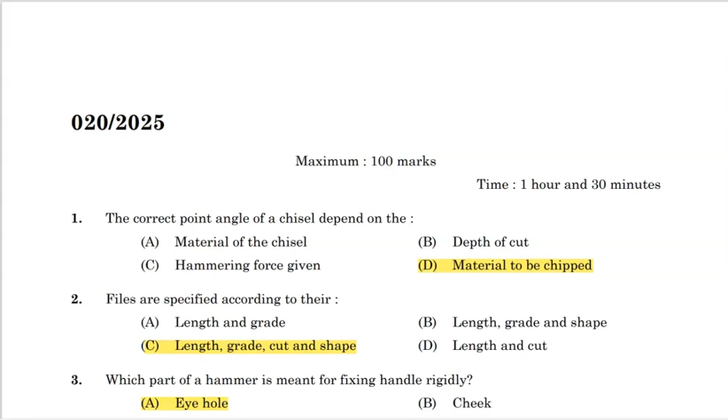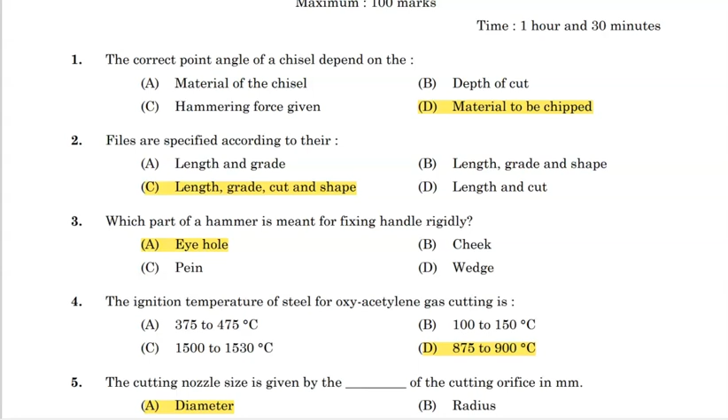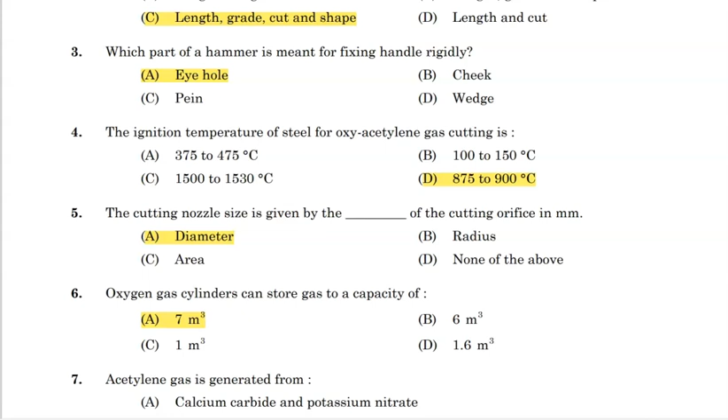5. The cutting nozzle size is given by the diameter of the cutting orifice in millimeter. A. 6. Oxygen gas cylinders can store gas to a capacity of 7 meter cube. A. 7. Acetylene gas is generated from B, calcium carbide and water.

8. Which oxy-acetylene welding flame is used for welding mild steel? A, neutral flame. 9. The selection of flux in gas welding depends upon A, composition of material to be joined.

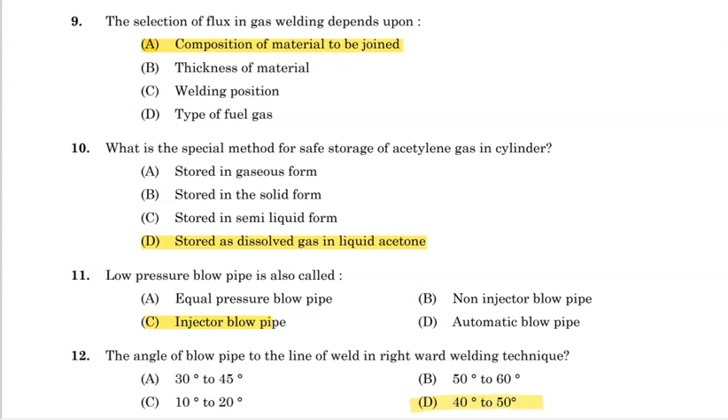10. What is the special method for safe storage of acetylene gas in cylinder? D, stored as dissolved gas in liquid acetone.

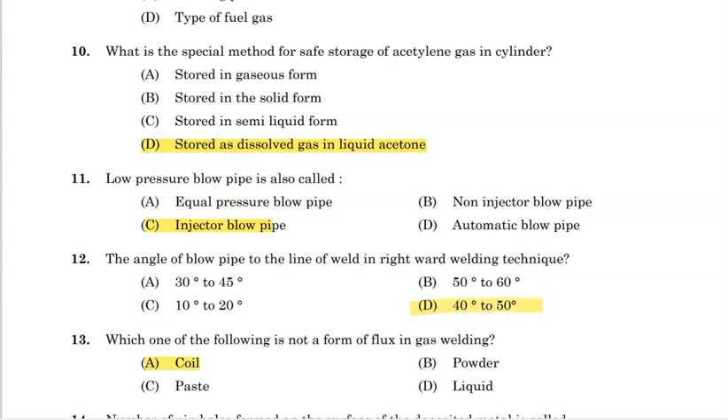11. Low pressure blowpipe is also called C, injector blowpipe. 12. The angle of blowpipe to the line of weld in right ward welding technique? D, 40 degree to 50 degree.

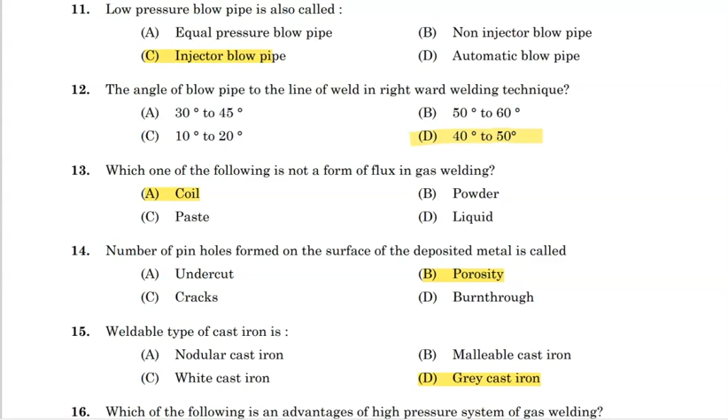13. Which one of the following is not a form of flux in gas welding? A, coil. 14. Number of pinholes formed on the surface of the deposited metal is called B, porosity.

15. Weldable type of cast iron is D, grey cast iron. 16. Which of the following is an advantage of high pressure system of gas welding? A, working efficiency is more.

17. What is the first compartment contained in the purifier? B, pumice stone. 18. The melting point of zinc is A, 419 degrees Celsius.

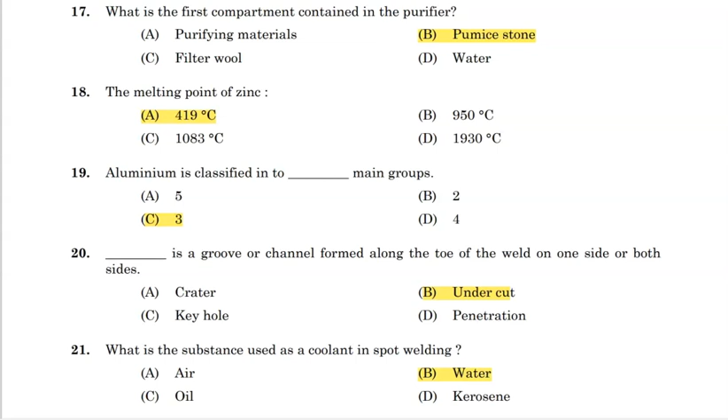19. Aluminum is classified into 3 main groups. C. 20. Undercut is a groove or channel formed along the toe of the weld on one side or both sides.

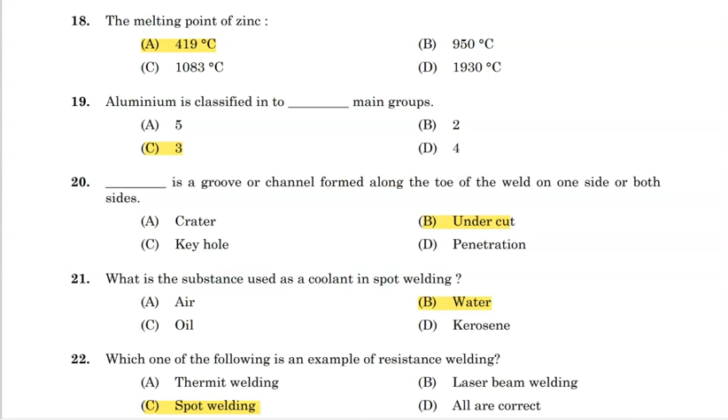B. 21. What is the substance used as a coolant in spot welding? B, water. 22. Which of the following is an example of resistance welding? C, spot welding.

23. The fusion is produced by the heat obtained from a concentrated beam composed in electron beam welding, primarily of D, high velocity of electrons.

24. Which of the following resistance welding machine is used to join pipe sections end to end? B, butt welding. 25. Which of the following operating variable in submerged arc welding controls the arc length? A, welding voltage.

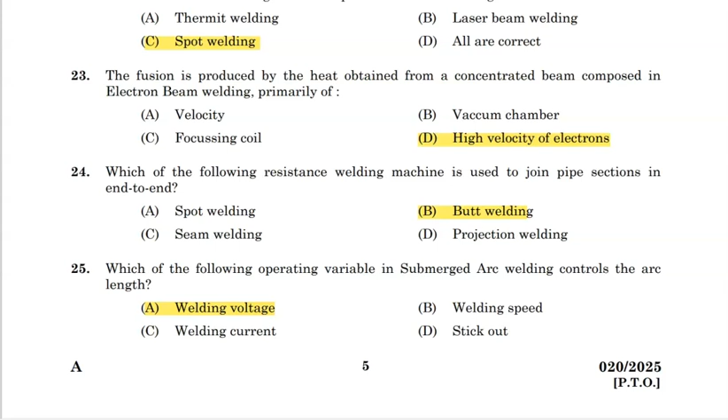26. Which of the following is not an advantage of resistance welding? B, the equipment is costly.

27. Which of the following property of flux is used in electroslag welding? A, it has high electrical resistance.

28. The reaction that takes place in thermit welding is B, exothermic. 29. In thermit welding, heat is produced between aluminum powder and iron oxide in right proportion. D.

30. Which is an advantage of friction welding? C, no filler rod or electrode is required. 31. Which of the following statements are correct about laser beam welding?

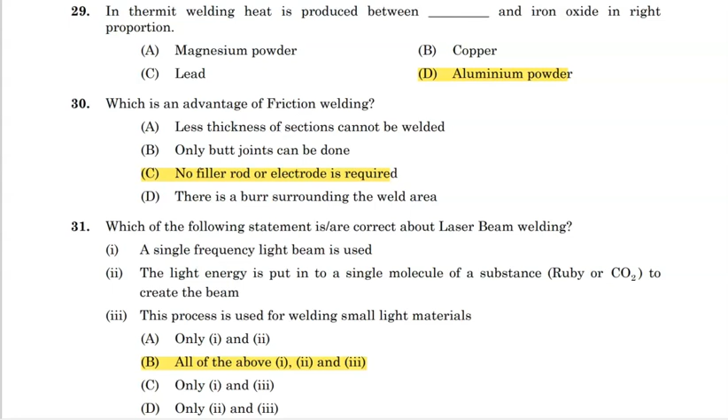ഇവിടെ തന്നിരിക്കുന്ന 3 ഉണ്ട്, അപ്പോൾ ഉത്തരം B ആണ്, all of the above.

32. The multi spot welding is A, projection welding. 33. Thermit welding is a form of C, fusion welding.

34. Which type of joint is required for spot welding? C, lap joint. 35. Electron beam welding is an automatic process performed in vacuum without a shielding gas. A.

36. A welder qualification test is to verify B, skill of the welder. 37. WPS means B, weld procedure specification.

38. Which of the following destructive test is related to Izod and Charpy machines? A, impact test. 39. The surface and subsurface cracks in the weldment of magnetic alloys can be inspected by D, magnetic particle test.

40. Guided bend test is used to determine ductility of the weld metal. A. 41. Temperature of plasma arc cutting is A, 20,000 Kelvin.

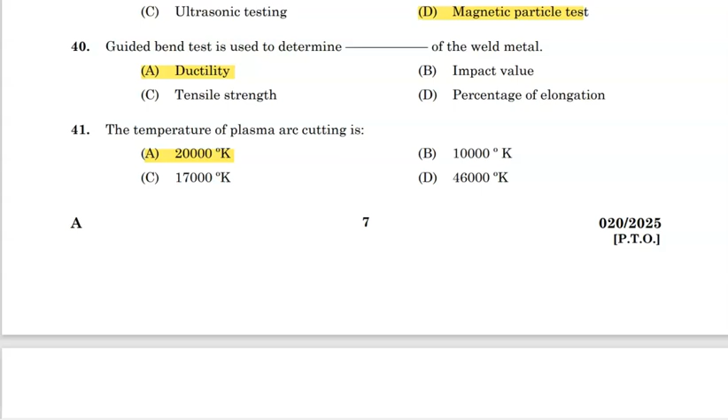42. Stainless steel can be cut easily by plasma arc cutting. 43. Surfacing is done to build up worn out parts of material whose dimensions have been affected, and make them as good as new, obtaining the required properties.

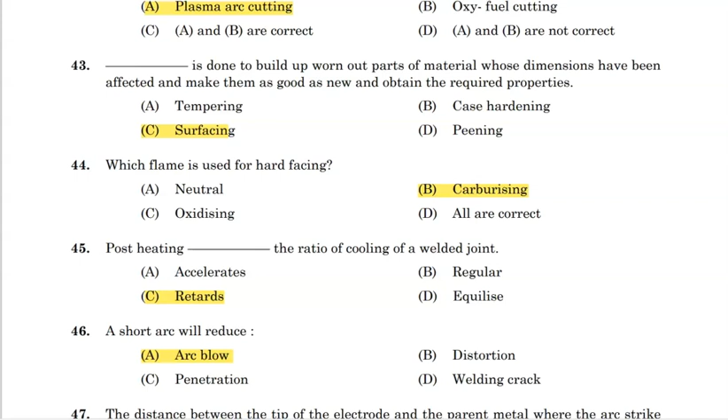C. 44. Which flame is used for hard facing? B, carburizing. 45. Post heating retards the rate of cooling of a welded joint.

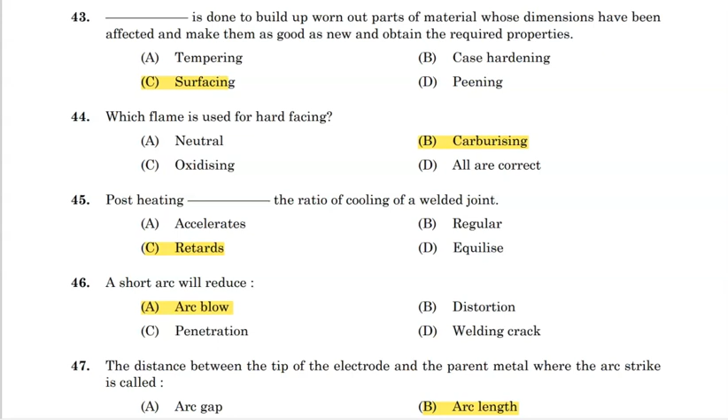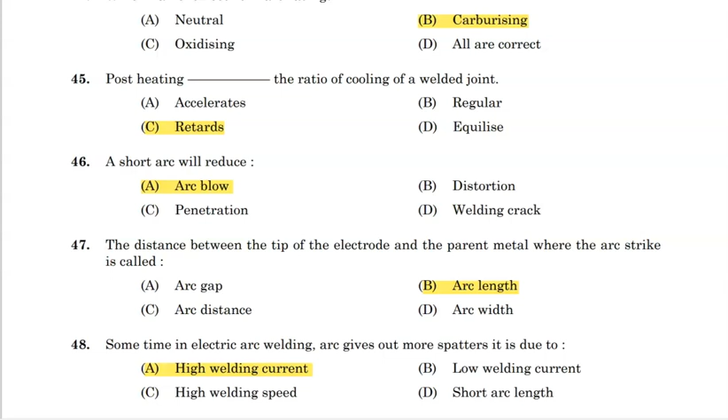C. 46. A short arc will reduce arc blow. A. 47. The distance between the tip of the electrode and the parent metal where the arc strikes is called B, arc length.

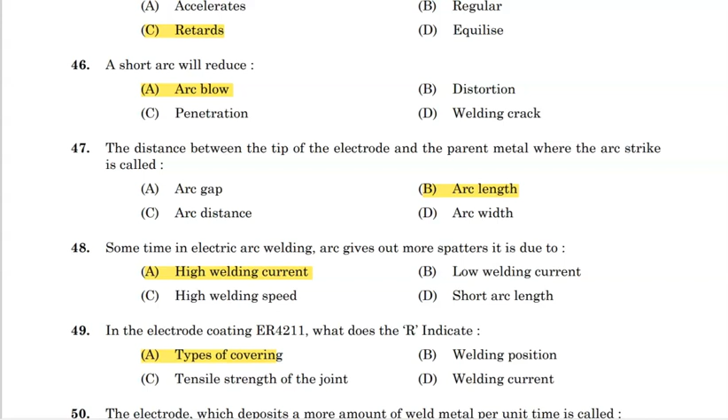48. Sometimes in electric arc welding, the arc gives out more spatters. It is due to A, high welding current. 49. In the electrode coating ER4211, what does the R indicate?

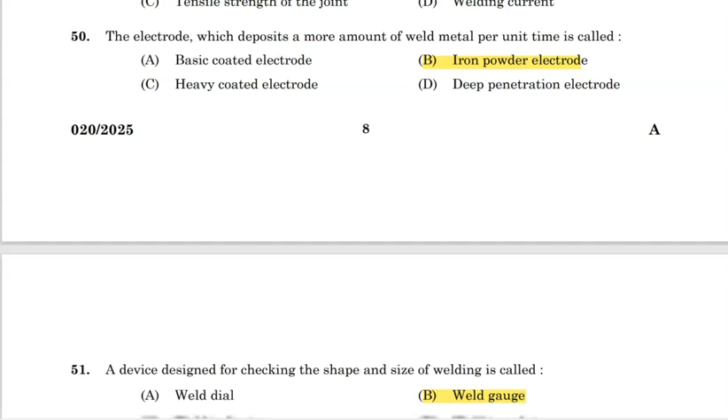A, types of covering. 50. The electrode which deposits a more amount of weld metal per unit time is called B, iron powder electrode. 51. A device designed for checking the shape and size of welding is called B, weld gauge.

Welding transformers are equipped with condensers to improve power factor. A depression formed at the end of the weld is called a crater. Electrode used for arc welding of aluminum contains 95% aluminum and 5% silicon.

The process of hammering the weld metal immediately after it is deposited is called peening. The semicircular deposit on a weld bead is called reinforcement. If two members are welded in the same plane, it is called a butt joint.

The conversion function of a rectifier is to convert AC, alternating current, to DC, direct current.

The pipe welding position that stands for 45-degree inclined position welding is 6G. The vertical position of groove welding is defined as 3G. The purpose of wrapping the weld cable around the job in welding is to control arc blow.

When hydrogen control is specified for a manual metal arc welding project, the electrode would normally be basic. For open site manual metal arc welding, the following equipment is available.

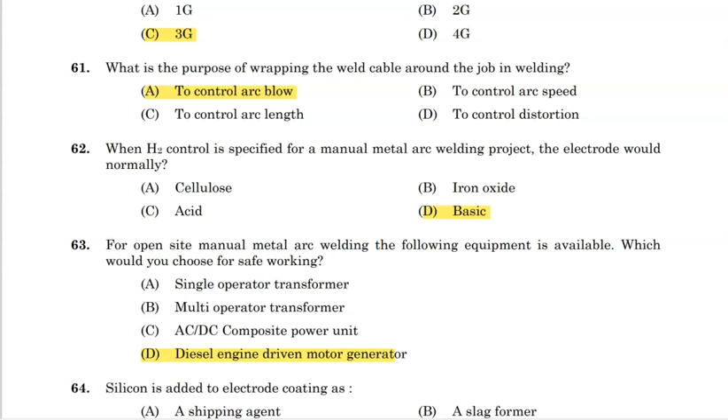For safe working, you would choose a diesel engine driven motor generator. Silicon is added to electrode coating as a deoxidant. When welding thin plate, distortion can be minimized by using back step welding.

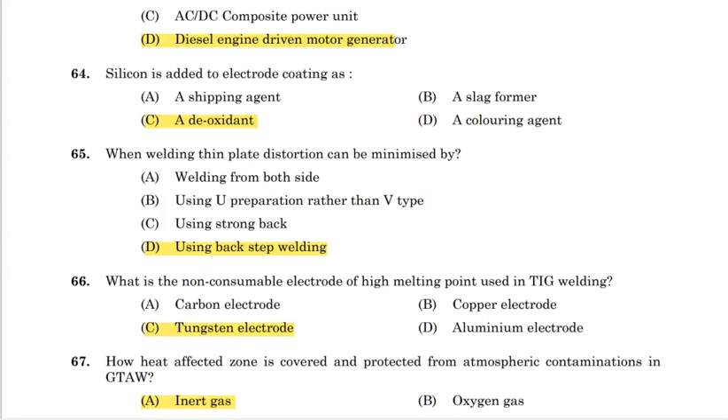The non-consumable electrode of high melting point used in TIG welding is the tungsten electrode. The heat affected zone is covered and protected from atmospheric contamination in GTAW by inert gas.

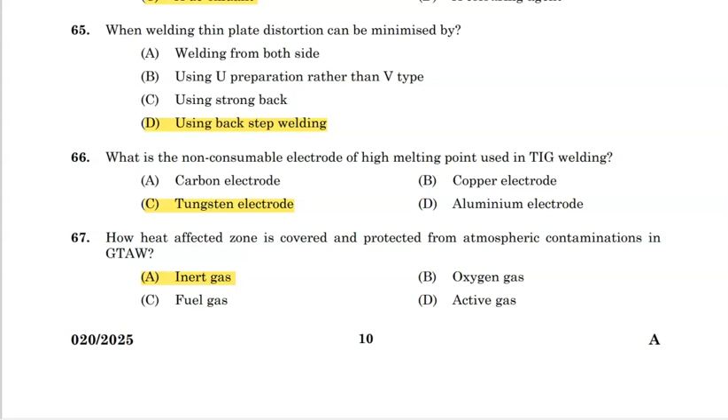The tungsten electrode suitable for welding stainless steel by TIG process with DC is the thoriated tungsten electrode. The current supply best suited for GTAW of aluminum and its alloys is AC. The defect while TIG welding if the current is too low is lack of fusion.

The electronic unit that helps initiate the arc in the TIG welding process is the high frequency unit.

The element added with tungsten to increase the current carrying capacity in TIG welding is thorium oxide.

The reason for using an AC power source in the TIG welding process while welding aluminum is that it cleans aluminum oxide.

TIG welding nozzles are made of ceramic. The color identification of tungsten with 2% thorium TIG electrode is red.

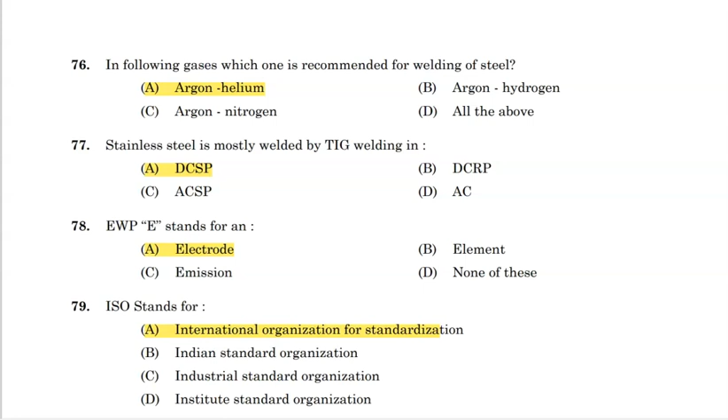EWP, the E stands for electrode. ISO stands for International Organization for Standardization.

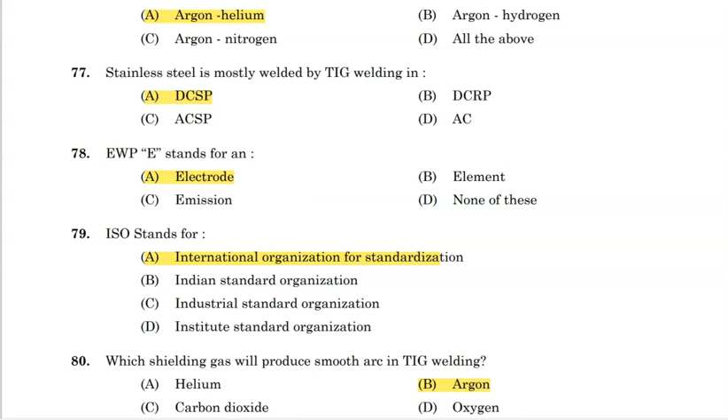The shielding gas that will produce a smooth arc in TIG welding is argon. The process also referred to as GTAW is TIG welding.

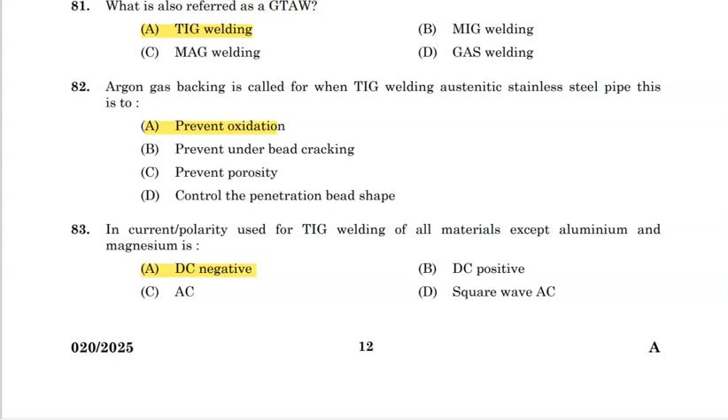Argon gas backing is called for when TIG welding austenitic stainless steel pipe, to prevent oxidation. The current polarity used for TIG welding of all materials except aluminum and magnesium is DC negative.

Pipe bores of some materials must be purged with argon before and during TIG welding in order to prevent oxidation of the root bead.

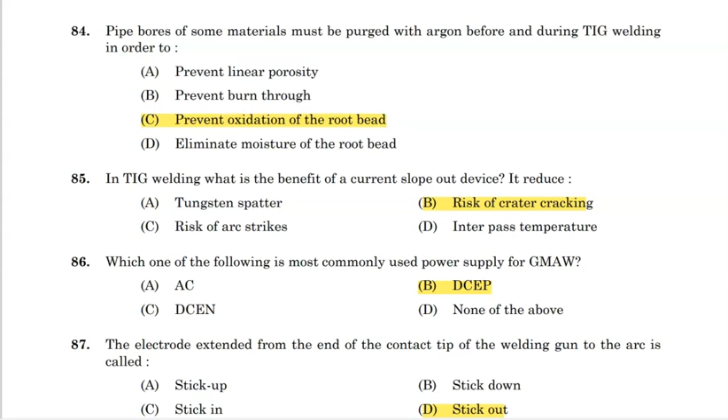In TIG welding, the benefit of a current slope out device is that it reduces the risk of crater cracking.

The most commonly used power supply for GMAW is DCEP. The electrode extended from the end of the contact tip of the welding gun to the arc is called stick out.

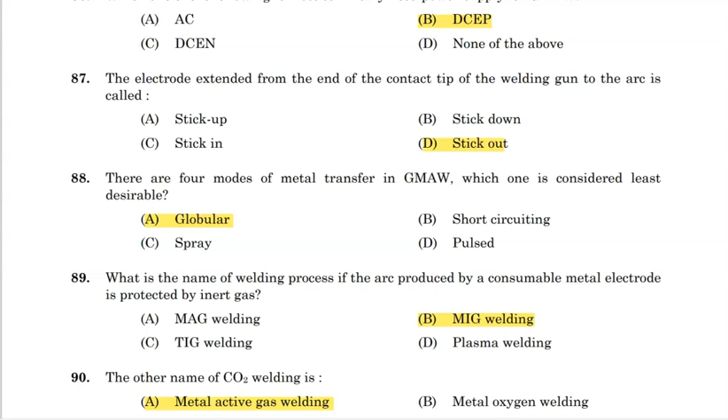There are 4 modes of metal transfer in GMAW. The one considered least desirable is globular.

The welding process where the arc produced by a consumable metal electrode is protected by inert gas is called MIG welding. The other name for carbon dioxide welding is metal active gas welding.

The contact tip of a GMAW torch is made of copper. In the GMAW electrode specification ER70S6, the S stands for solid.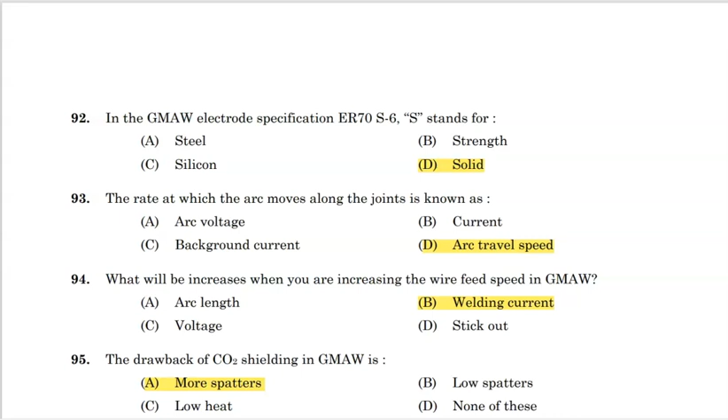The rate at which the arc moves along the joint is known as arc travel speed. Increasing the wire feed speed in GMAW will increase the welding current. The drawback of carbon dioxide shielding in GMAW is more spatter.

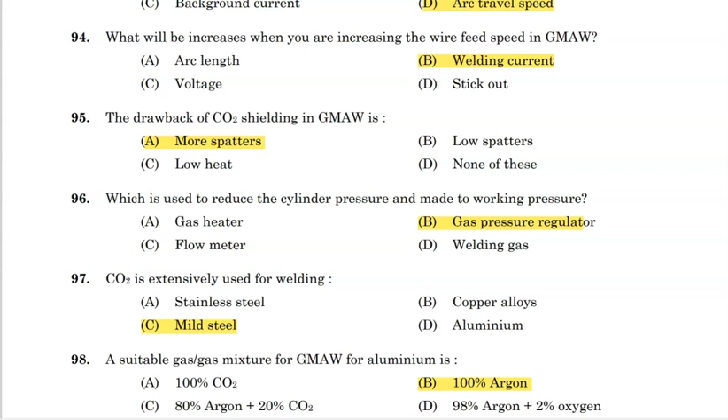The device used to reduce the cylinder pressure to working pressure is a gas pressure regulator. Carbon dioxide is extensively used for welding mild steel.

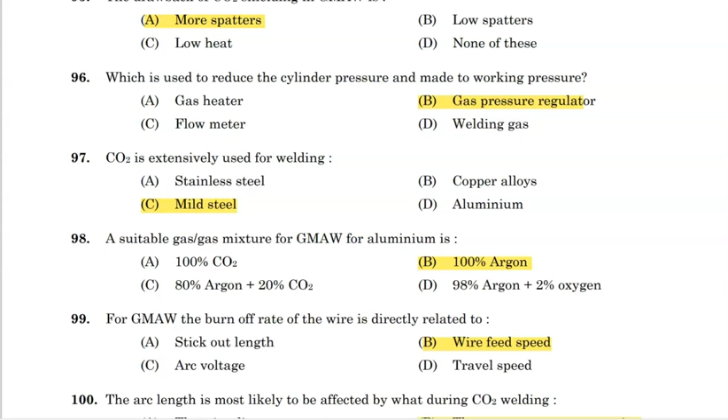A suitable gas or gas mixture for GMAW of aluminum is 100% argon. For GMAW, the burn off rate of the wire is directly related to wire feed speed.

The arc length is most likely to be affected by the current return connection during carbon dioxide welding.